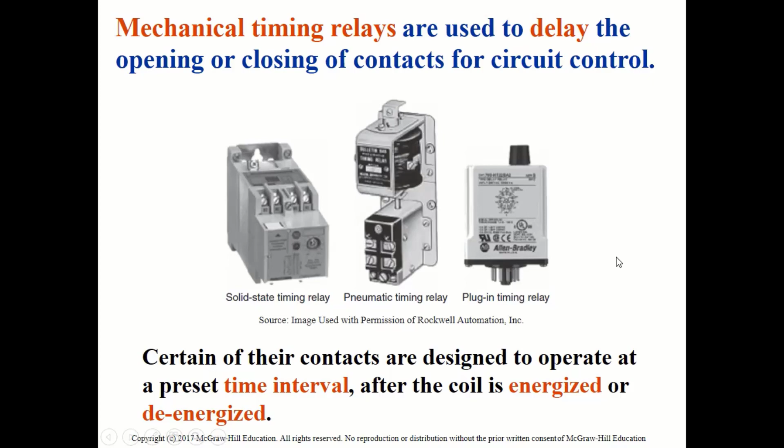There's a few other ones that have appeared as we have software that is able to do that. So you still actually can use these devices. These are mechanical or electromechanical relays that do timing functions. So here's an on delay pneumatic timer. So this guy actually uses air, right? So you have an instantaneous contact that changes state as soon as the timer coil is powered.

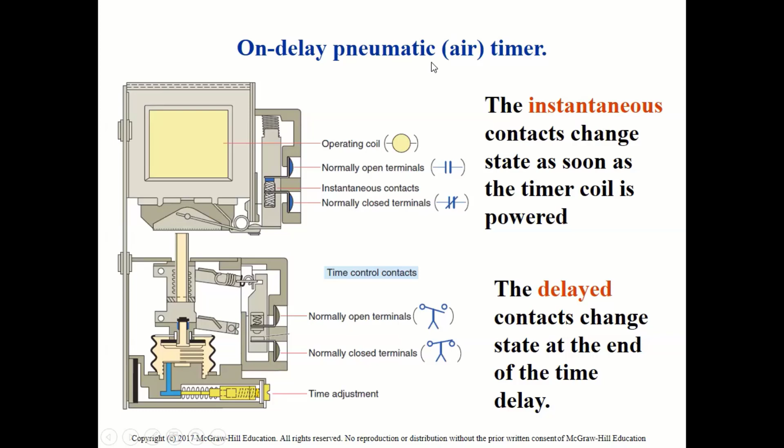And you have the coil, just like any other relay. You have the normally open terminals. You have the instantaneous contact, and you have the normally closed contacts. And of course, that will change behavior when you connect them. So they change state. And then you have a normally open terminal, and you have a normally closed terminal. And then you have the ability to adjust the time, like a little delay element on that. So that's an on delay pneumatic, or air timer, as it's called.

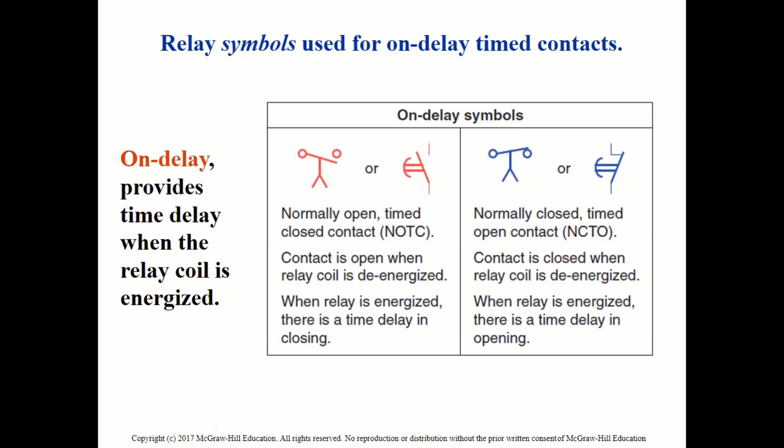All right, they're used for on delay timer contacts. On delay provides time delay when the relay coil is energized. In other words, it's energized for a period of time. Right, so you have the normally open, timed close contact. So the contact's open when the relay coil is de-energized. When the relay coil is energized, there is a time delay in closing. And then you also have the counterpart, which is normally closed. So in both cases, you turn on the device and the device goes on for as long as you have set the device, right? 1 second, 2 seconds, whatever that might be.

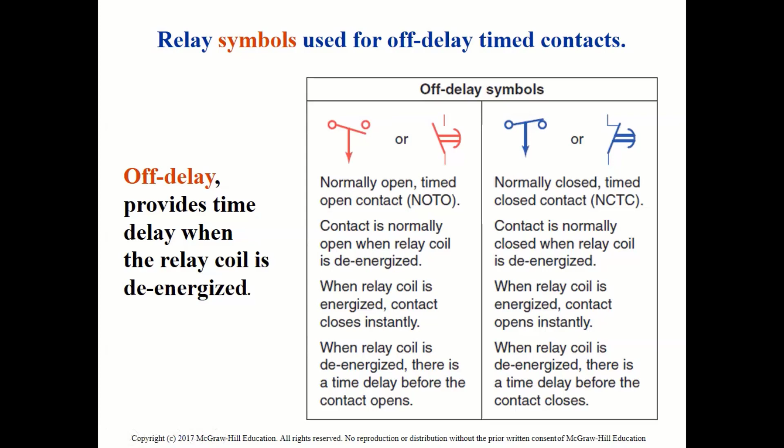All right, this is the off delay, right? So the off delay provides time delay when the relay coil is de-energized. So it does the opposite, right? Off delay. I'm going to talk about a few applications, but again, it's got the same idea, normally closed and normally open off delay contact. So there's actually two already we talked about, on delay and off delay timers.

All right, so here's an example. Sometimes they refer to it as the DOE, which stands for delay on energized. And so that particular timer goes with S1 being the enable. So you enable that and it goes for 10 seconds. And after 10 seconds, then the element that you want to enable or activate goes on, right? So that's an on delay timer. You wait for 10 seconds for something to occur. Okay, that's how that works.

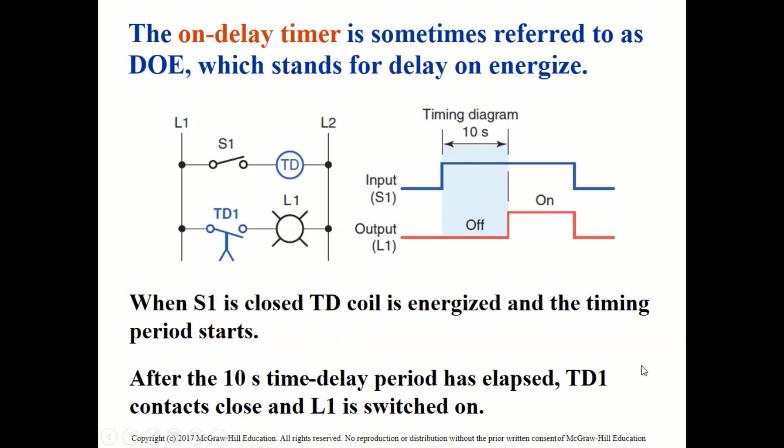Here is a normally closed, timed open contact. So the idea here is something is already on, and then you enable that timer, and after the time expires, you want the system to be off, right? Because of the normally closed contact situation. So that contact's going to open as time expires.

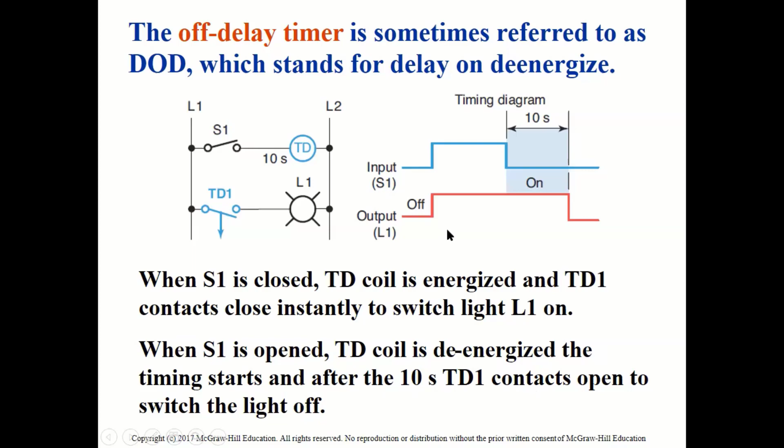All right, then we have the counterpart, which is the off delay timer, sometimes referred to as the DOD, okay, which stands for delay on de-energized. And so we have S1, which enables; TD, which is the off delay timer coil, is energized, and the TD contact closes instantly to switch the light on, right? And so when S1 is open, the TD coil is de-energized, and the timing starts; after the 10 seconds the TD contacts open the switch, and then the light is off. So they do a little of the opposite function.

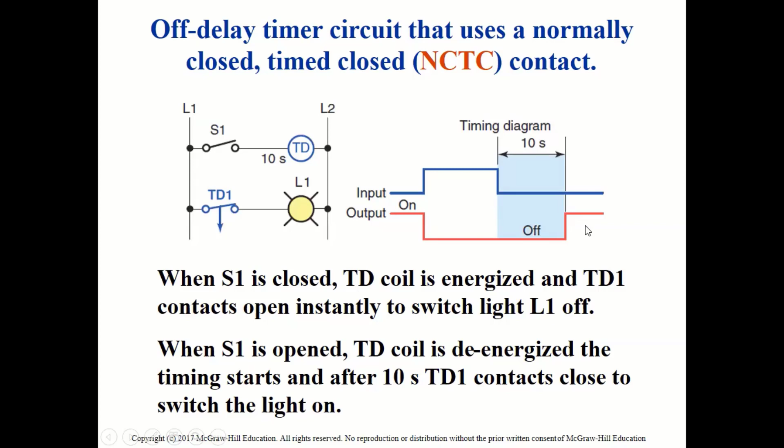Here's an example of an off delay timer with a normally closed, timed close contact. Again, the S1 is removed, and at that time, then the off delay timer goes on, and at the 10 seconds being off, then the output event is triggered. So two types of timer, right? On delay and off delay. That's two of the many types.

Not all timers have the ability to retain the time, right? And this is kind of a neat feature. What happens with a TON and a TOF is that they're set for a certain time, right? You cannot alter that. You put it on to 10 seconds or 20 seconds, whatever it might be. But if something happens in between that period of time, the timer doesn't have memory to remember that you had it on for 5 seconds, right? So you want something better than that, and that's the reason why we now have RTOs, which are retentive timers.

A good application that is very common, actually, for use of retentive timers is timing the work cycle of a machine, right? So engineering maintenance personnel will want to maintain, or provide service to a machine, and the original equipment manufacturer have decided that every 1,000 hours, right, you need to maintain the machine, whatever, calibrate, lubricate, change parts. And so an RTO timer is a good example of that.

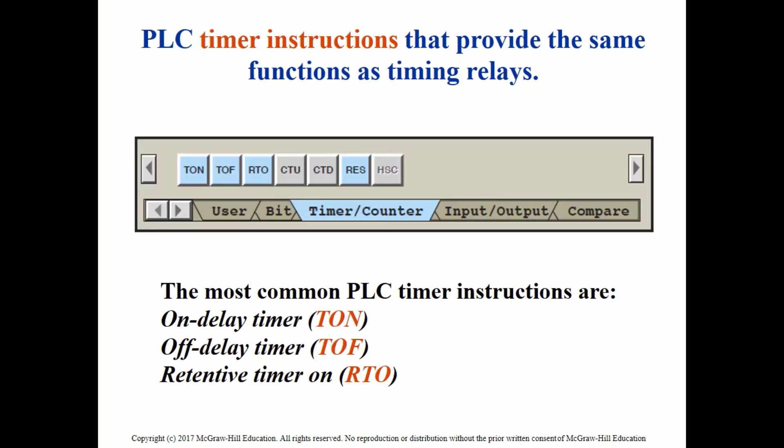In the old days, when I was a tech person way back in Pepsi, before I got my degree, actually, it was a tedious task to maintain equipment because you had to have logs and stuff like that, right? Now there is software, and in the case of automated machines, it's a bit easier because that's something that you incorporate in a program. How many hours the machine has worked, right? In the days before, you just estimated because you didn't have a way to control the true hours of work of the machine. So that's an example of RTOs.

Quantities associated with timer instructions. You have a preset time, right? And that's the duration for the timer circuit. You have an accumulated time, and that's the amount of time that has elapsed from the moment the timing started. And then you have a time base, which is the interval that the timer times out.

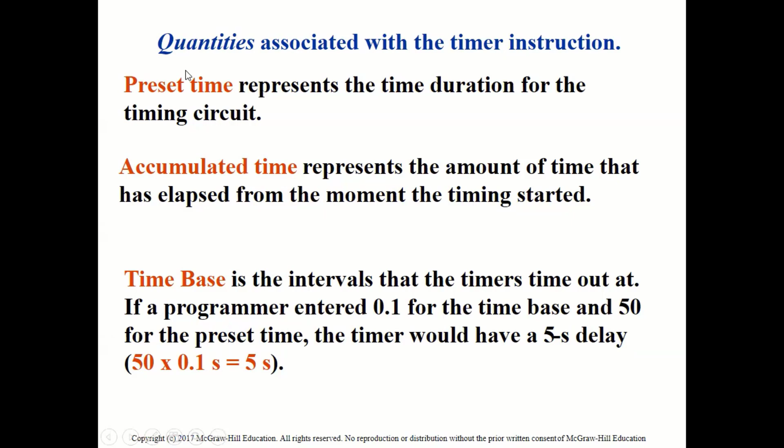If you had a 1/10 of a second for a time base and 50 for the preset time, the timer then will be on for 5 seconds, right? So those are part of the settings that you have to set on. It used to be that you had to set on. They're a little bit different, but you still are going to have preset, accumulated, and time base of some sort.

Coil formatted timer instructions. So here is a coil formatted timer instruction, which tells you the type of timer, right? And we already know there's 3 of them, TON, TOF, and RTO, right? Then they need a label or address, and they also need a timer preset value, right? They also need an accumulated, and they need a time base. So all of those parameters are set when you set your timer.

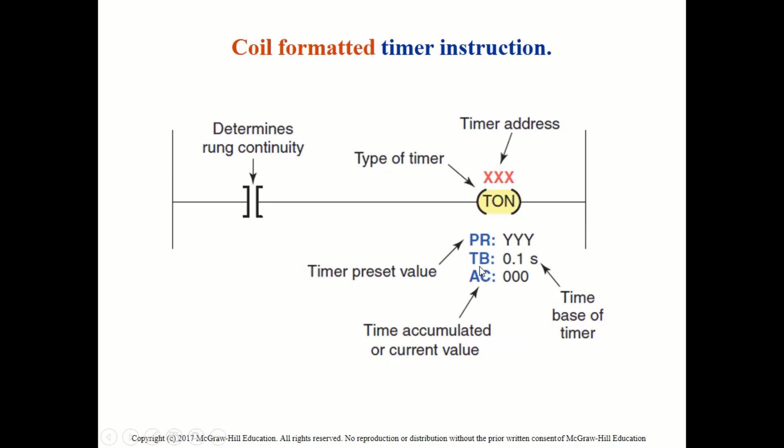There's a generic block formatted retentive timer, which is more like what they look today. You have a control line and you have a reset line. Control line is what triggers the timer. Reset line is what you use to reset the timer, right? Clear off the timer. And then you have the output line, which is what enables whatever event you want to do. Turn on, turn off, keep going, or whatever.

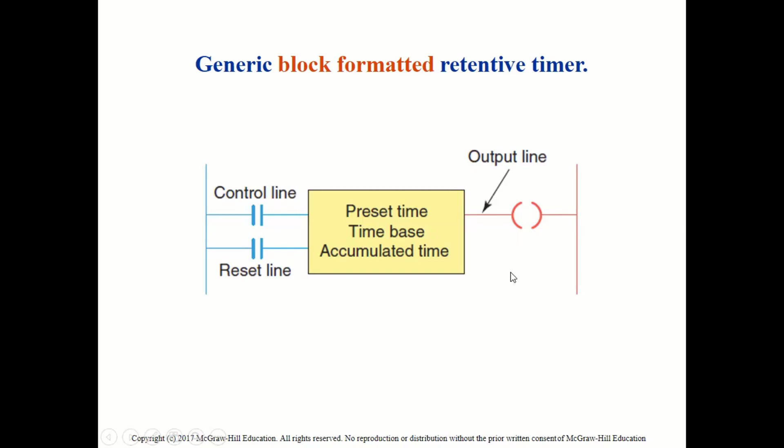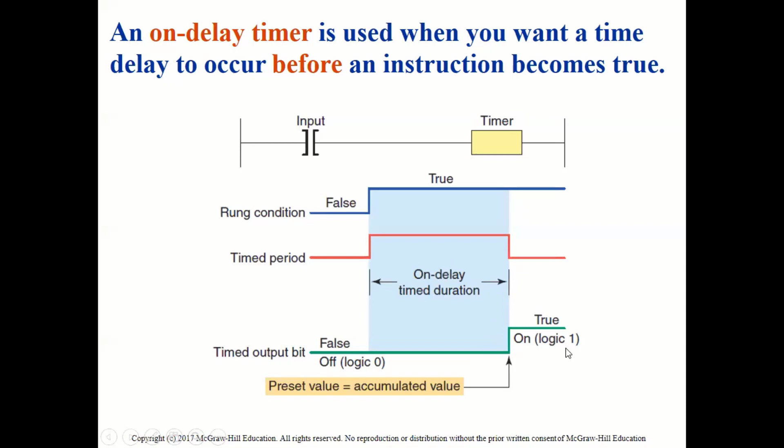All right, on delay timer is used when you want a time delay to occur before an instruction becomes true. So we've said that. And so the rung condition is false, and then it goes through. Then you have a time period, on delay time duration, and then after the time expires, you want something to go through. Okay, so that's the on delay timer.

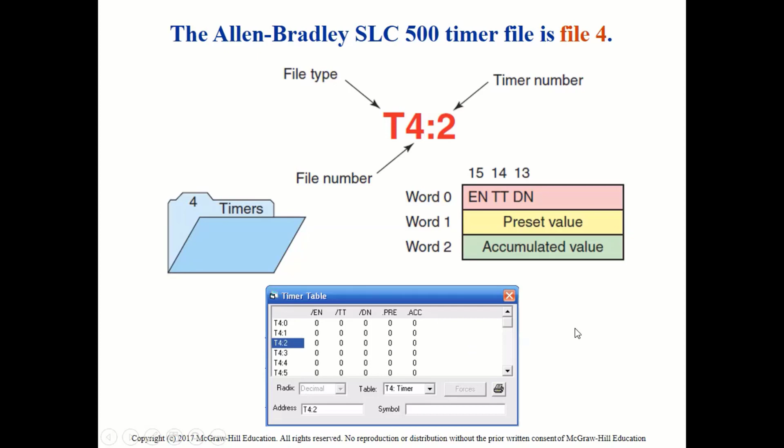Timer tables are what used to be used to look at the words and bits associated with the timer. Notice here that this timer table has the name of the timer, T4:2, right? You can create a virtually infinite number of timers. And then you have the enable bit, then you have the timer timing bit, then you have the done bit, you have the preset and the accumulator, right? We'll talk about those. And so they're all there. And this can be manually altered or modified.

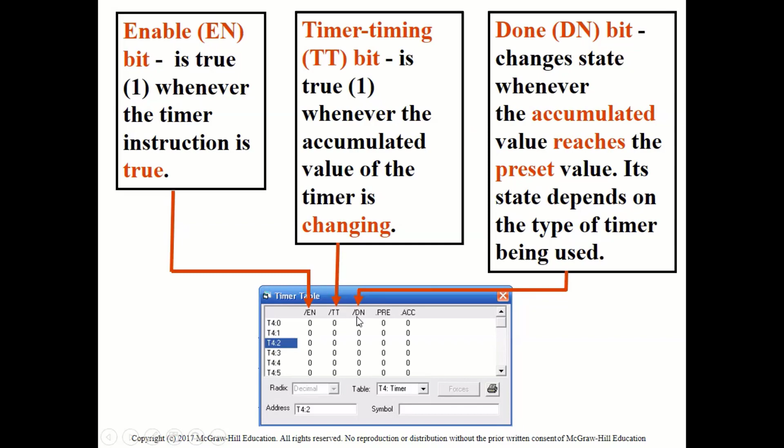So the enable bit is true whenever the timer instruction is true, right? The timer timing bit is true whenever the accumulated value of the timer is changing, or timing is going, right? The done bit changes state whenever the accumulated value reaches the preset value. Its state depends on the type of timer being used. So that's the done bit, kind of an important bit actually. The done bit is where you connect things that you want to enable or disable with a timer.

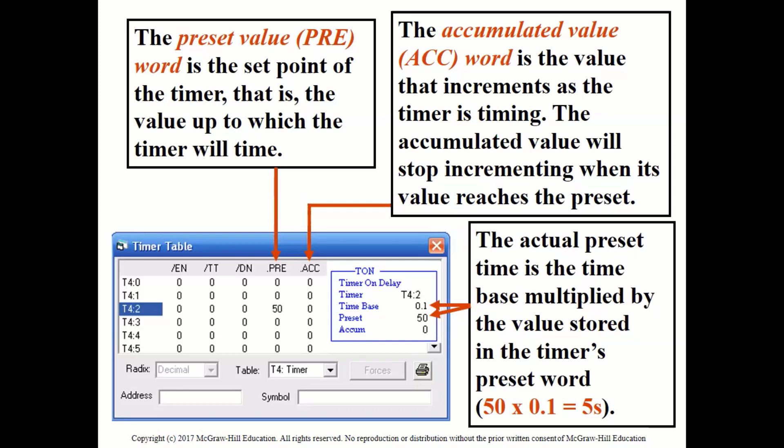Then you've got the preset value, we talked about that, which is a word-based value. That's the set point for the timer, the value up to which the timer will time. And then you have the accumulated, the actual value. So again, as we program timers, they're not going to look exactly like this, but they will have the same principle of operation, right? They might look a little different, but at the same time, you have to take into account all these bits and word elements.

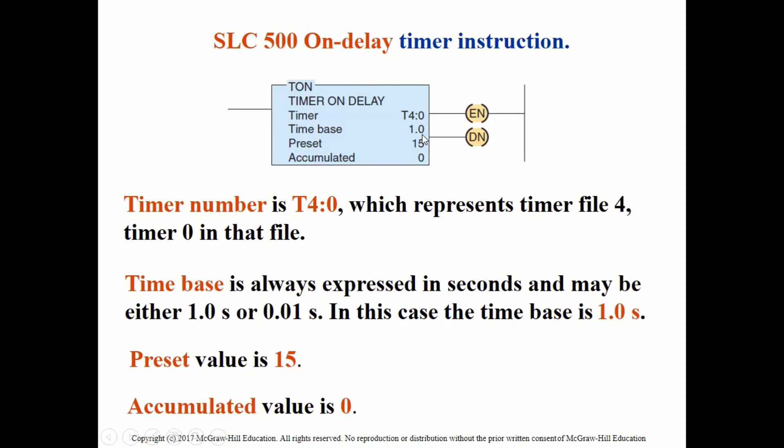Here is an on-delay timer instruction. Timer number is T4:0. That's file 4, timer 0 in that file. Time base is 1, right? So 1 second. Preset value is 15 and accumulated value is 0. So again, you're going to have the same things except that the graphic, the command, the icon or the object may look a little bit different, right? As you do your programs.

There you go. This is another version of software that was used not too long ago. As a matter of fact, many companies are still using ControlLogix 5000. For whatever reason, they cannot just move on to the newest software and hardware. But there's a timer, and it's got a timer tag name, and it's got the preset and accumulated. It's got the enable and done bits, and so forth. So that's a little bit of a different instruction.

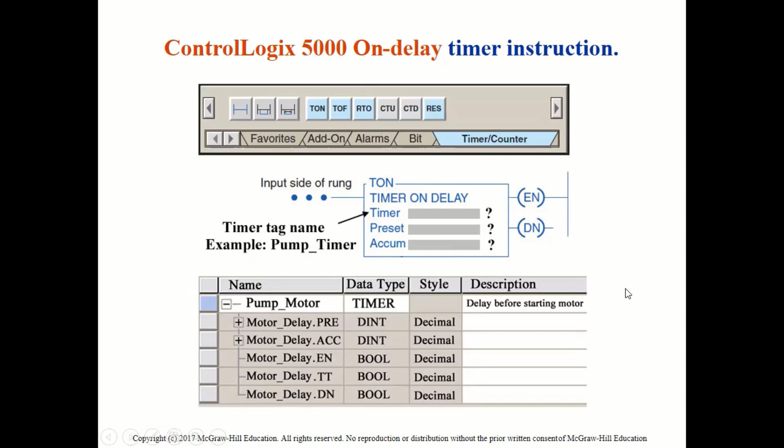So this is an example of an on-delay timer program. You already identified the timer name, the time base, the preset and accumulated. And again, notice that the enable bit is what connects the output of that timer to the task that you want to time. Also notice here that we're using virtual instructions like T4:0. That's an examine-if-closed contact that is going to be powered by the enable bit, right? And then we have here another examine-if-closed contact that will be powered by timer timing. And then the done bit.

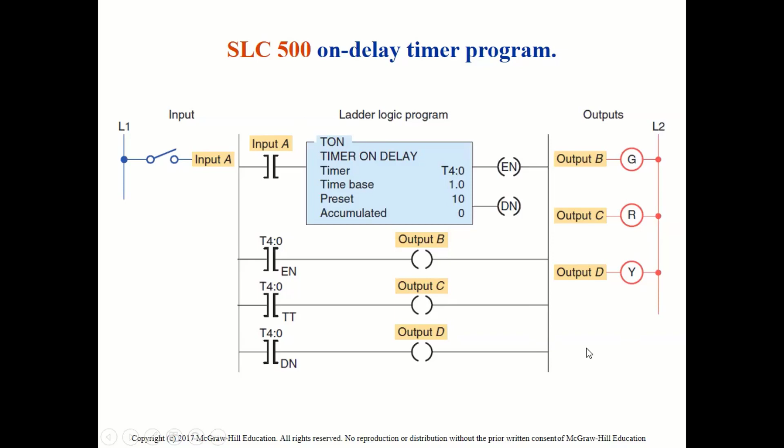Okay, so how can we read it? Well, output B will energize at the moment, right, that the timer is turned on. Output B is going to energize. Output C will be energized for as long as the timer is timing, right? And output D will turn on when the timer is done timing, right? So that's how you can read that.

Excuse me. I feel like I need to sneeze a little bit. Sorry about that.

Okay, so let's move on and look at this example of a timer using LogixPro. So there's a timer timing.

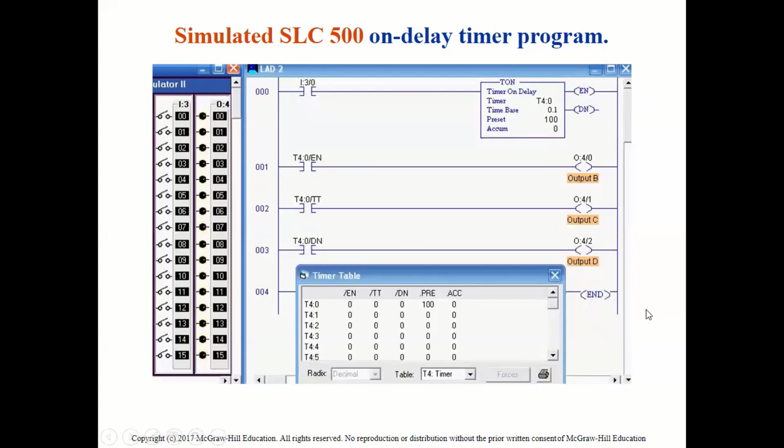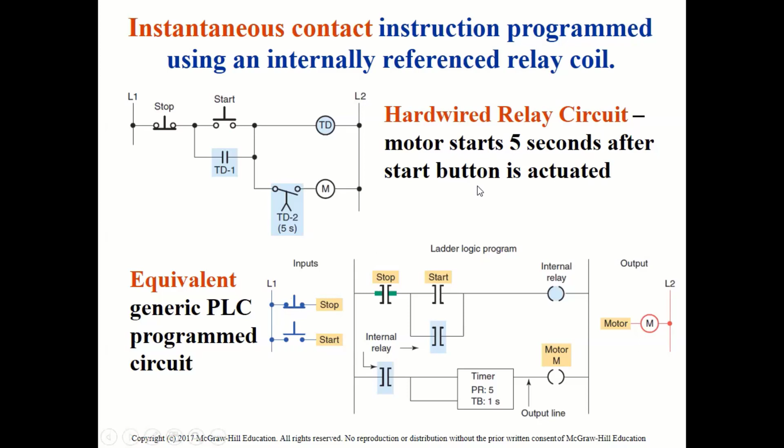Good question. All right, instantaneous contact instruction using an internal reference relay. So there is one using an electromechanical type of timer. TD stands for time delay. TD1, that's an auxiliary contact of that time delay, right? And then TD2 is the actual enablement of that. So down below, we have the equivalent PLC program with a timer. So that's a little example. Let's see what we got here. So that's a timing event. You want to run the motor after 5 seconds.

Another good application that I can think of timers is sequencing the startup of an operation. Again, in my early career, I remember that a particular company I worked for had to set up some giant, what they call compensation benches, I want to say. But the idea is every time you have heavy loads that are going to consume a lot of power at the start, you need somehow a way to compensate that.

So in the old days, what they used to do is they'll have these giant capacitors, if you will, that will be there for when 20 operators will put their hands on the control, right? And 20 100, 200 HP motors will crank up, right? So that was an awful moment. Okay, so with controls like this, one of the things that have come out, and I have seen it also, is that now you can sequence, right?

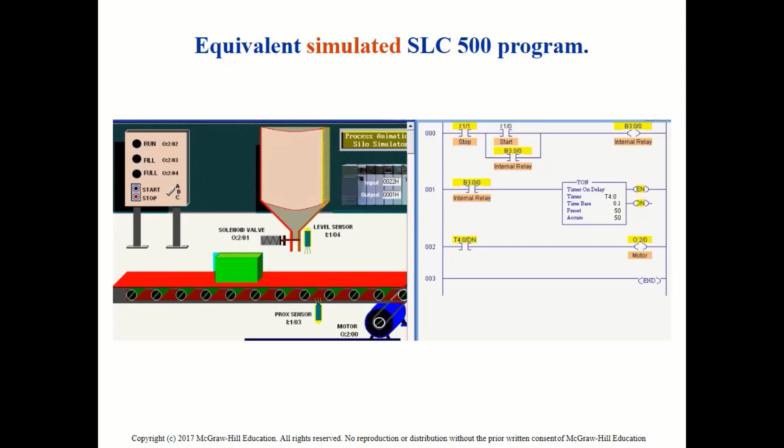Because the previous belt, the one in front of it, had to be running for a certain amount of time before the one behind it would start, or else it would overfill. Yes. Exactly. And that's another reason why, right? You want to create a sequence so that your last conveyor doesn't have to be running until load gets to that conveyor. And so we're going to do some examples and some labs that will give you some ideas on how that works.

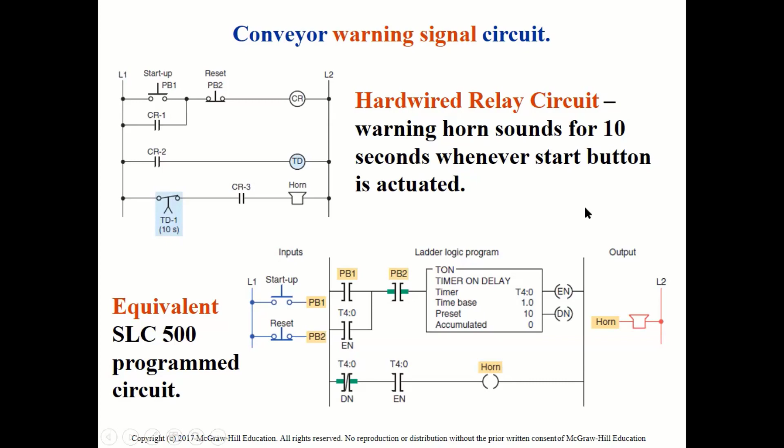Conveyor warning signal. So there's the hardwired relay circuit, and speaking of the devil, right? This is an example of a system that uses a timer to signal a conveyor running. Okay, let's see it in action. It's going to time for 100 units of time, and then the horn will go off.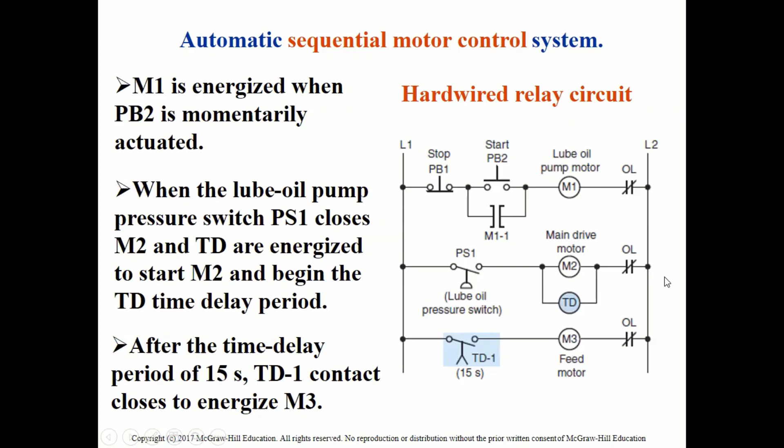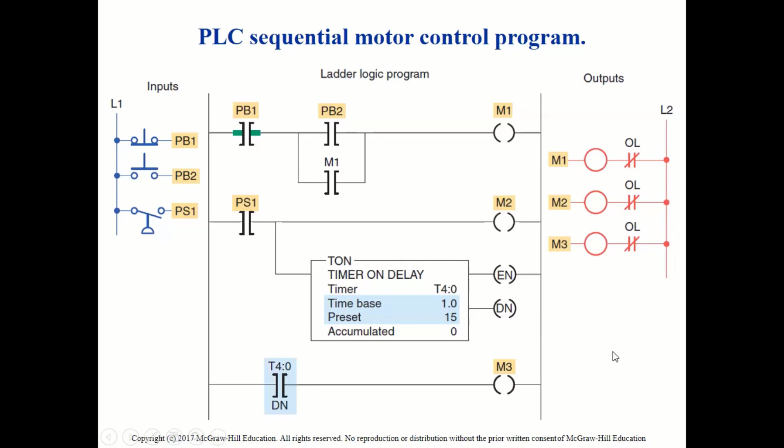That's the second rung. After the time delay period of 15 seconds, which is how it's set, TD1 contact closes to energize M3. So a sequence of motor starting. And this is how it looks in ladder. You have PB1, PB2, PS1, and the sequence that's gonna follow, right? So M1 energizes, then PS1 goes in, energizes M2. There's a timer set to 15 seconds before M3 can turn on. 150 units of time. That's about 15 seconds.

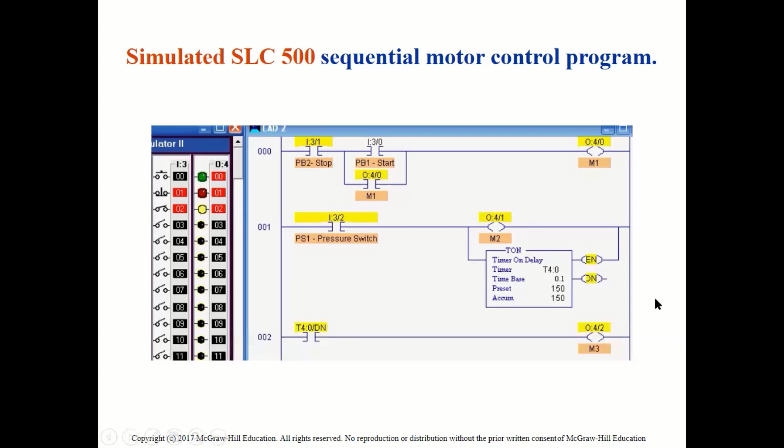All right, the off delay timer, it's just a timer that does the opposite. It's called the TOF. It starts timing when the instruction goes from on to off, or from true to false. So S1 is the input enable bit for that off delay timer, it is on and then goes off. At the moment it goes off, the timer timing bit goes on, and it's going to stay on for the preset time, right? That means that the done bit will stay on until that time expires and then goes off.

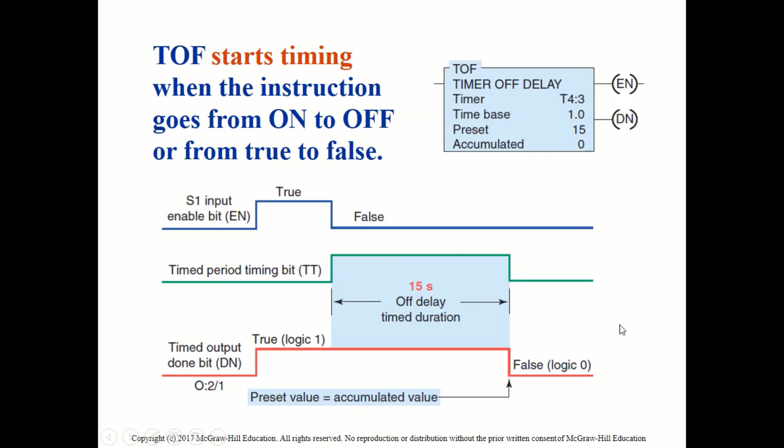It does the opposite, right? While the on delay timer times the event while the timer is on, this one times the event while the timer is off, right? Off delay timer, here's an example of that. When the switch is first closed, the lamp is switched on. When the switch is open, timing begins and the lamp switches off after the 15-second delay. If logic continuity is gained before the timer is timed out, the accumulated time is reset to 0. In other words, on delay timers and off delay timers do not have retentive capacity.

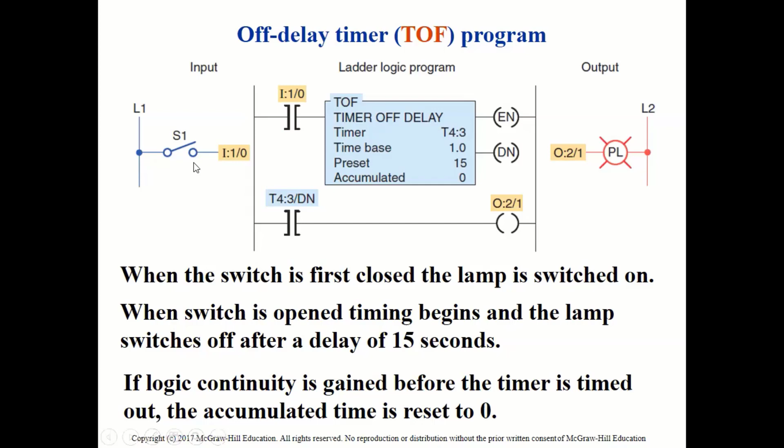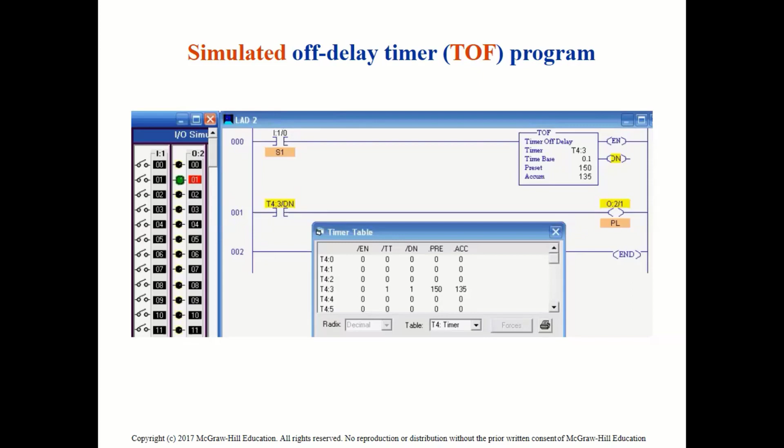Okay, so here's an example. Light is on, signal is removed, time off is going until the expiration of the set time. That's what's called an off delay timer, right? Because it's off and then starts timing. Okay. Program for switching motors off at 5-second intervals. That's part of the conversation that we were having, right? And you guys are gonna do some of this in your labs.

All right, so we have off delay timers because we wanna delay those motors. So the switch starts the process, and then observe that we're using the done bits of those timers here, right? From the first off delay timer, we're using the done bit to enable M1. From the second off delay timer, we're using the done bit to energize M2. And from the third off delay timer, we're using the done bit to energize motor 3.